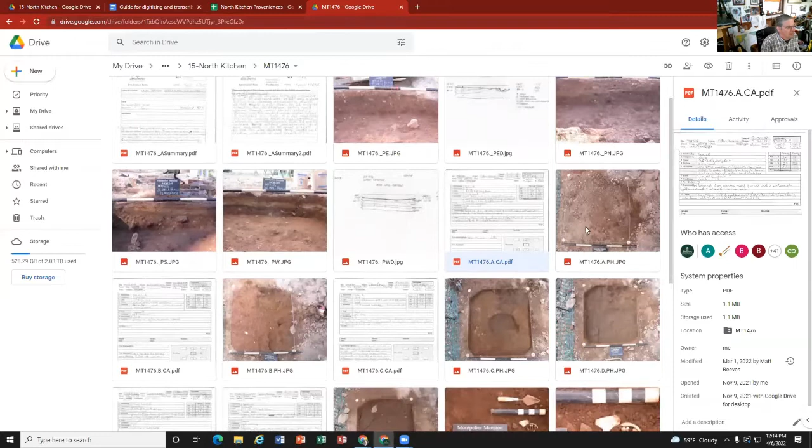All right, so what's good to do is basically go through these cards and just get familiar with them. So this is stratum A.

It was below strat O, which doesn't have a card because - is there a strat O in this? Yeah, there's no strat O listed in this. I think strat O is just considered the rubble from the building.

And you can see all these descriptions, the soil color, the texture - this is all the information you're going to be entering as you get into the digitizing process and the transcriptions. And this has how the stratum relate to each other. Stratum A is below O and it's above B, C, and D.

And then when you look at this drawing right here, you can see this is the bottom of A, and it came down to B, C, and D. And when you look at the opening photo for A, you can see that A is all across the unit.

And so usually the cards, as I remember, have the opening drawing. Yeah, what do the cards usually have - is it the opening drawing or the closing? I always thought it was the opening. I always thought it was the opening too.

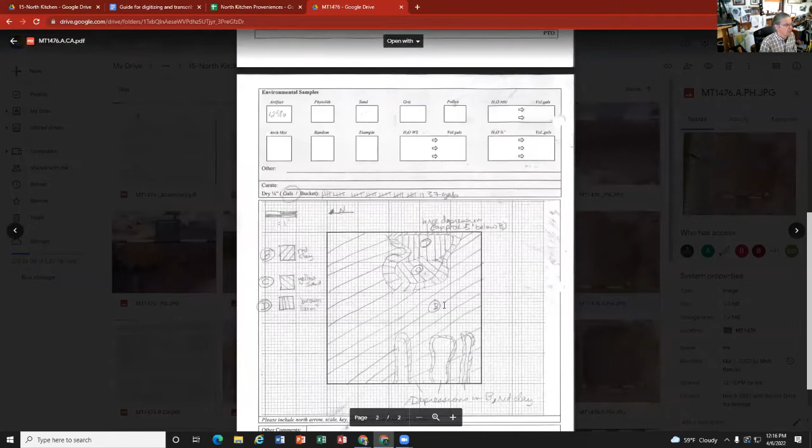Yeah, this is why this one's a little confusing, because usually it's the opening drawing, but this is the closing because it's come down into B, C, and D. You can tell that by the drawing, but also by this description right here - it comes down to B, C, and D. So when they took off A, basically all of these different stratum are here.

And how you know that A went across the unit is in this opening photo - A is everything. So A is bits of concrete from the destruction of the building, and basically it's all the stuff that needs to be cleaned off.

And then when you get to stratum B, which is below A in this card, you can see the opening of B. You've got B, which is all this, and then you've got C and D, which is this feature right here. So B is what comes off after A.

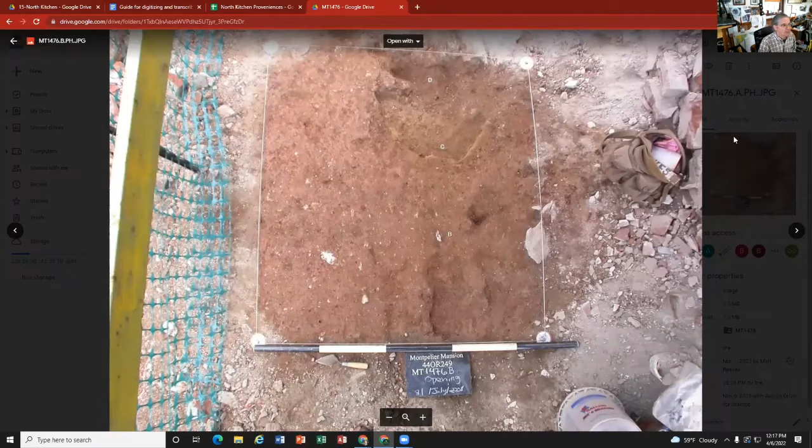And then you can keep on going through the cards. Stratum C was excavated, and it's contemporaneous with B. And yeah, it looks like they were doing closing for all these cards.

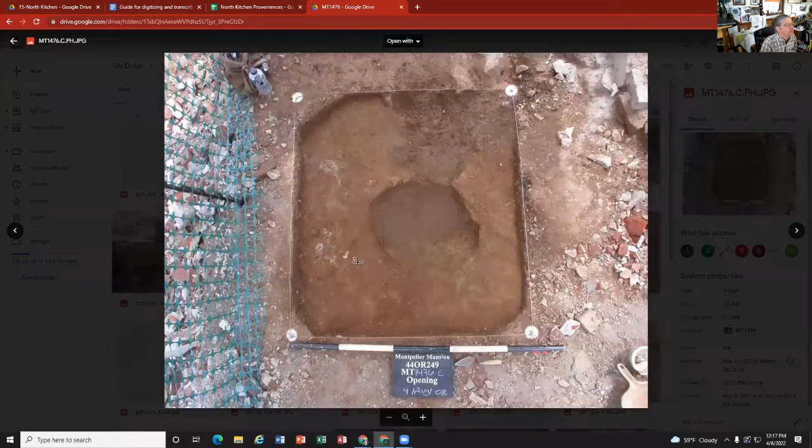And stratum B came down to C, which is this area right here.

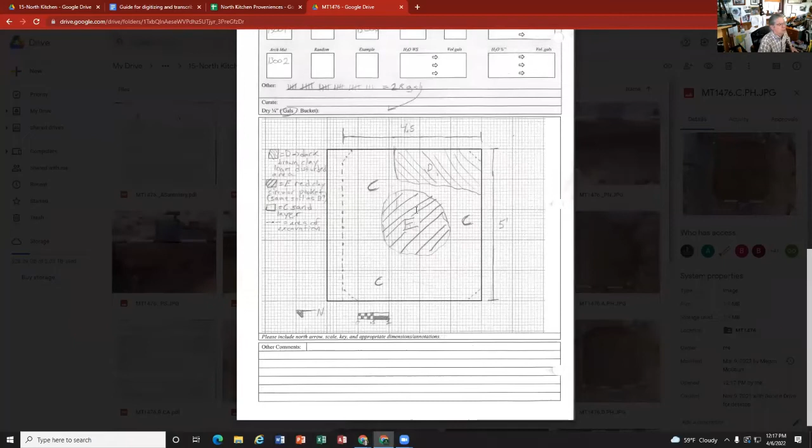And C is, okay, this one shows the opening of C because it shows C being all this area right here. And when we get into digitizing this, we'll talk about how to handle the fact that you've got this area in the middle.

That you can't really draw in because you can't draw that E. You can't draw E. Yeah.

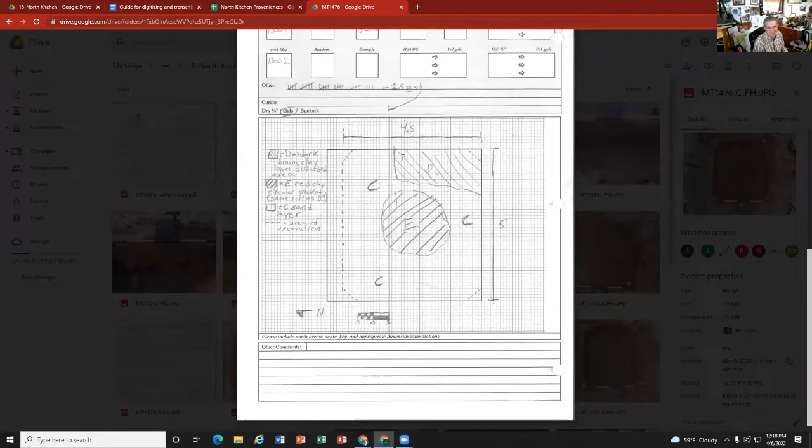And so C is just going to be, when you draw C, it's going to be this area right in here. And it's just going to, we can't let perfect be the enemy of good in this process. Just do the best that you can.

If you connected D and E at one point, you could get them all in there. That's pretty tricky with the app.

I wouldn't bother. What we'll do is we'll go back and fix this when we do the finalizing of these records, when staff does this next year in ArcGIS Pro, because you need the full version of ArcGIS Pro to really edit these in a proper way.

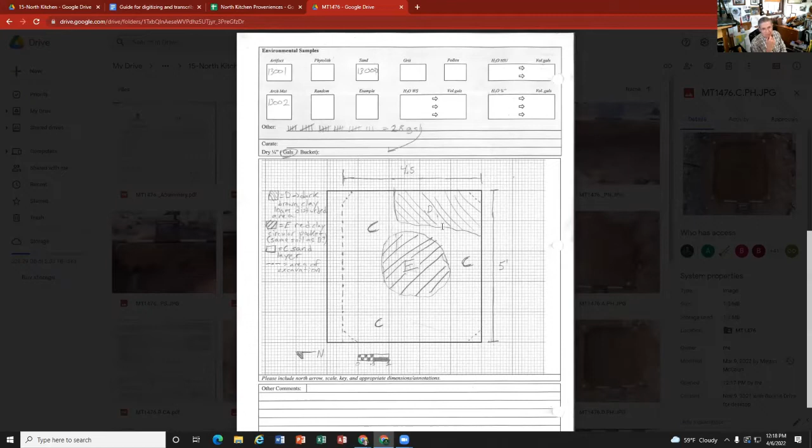But what's the big help is getting all this stuff transcribed. That's where you all are doing the lion's share of the work with all this, and it's a huge help. So, but let's get into this.

Let's start digitizing. So we're going to start out with stratum A here, and stratum A is listed as MT1476A. And what we'll do is, another thing you can do is check your sheet and understand how everything was excavated before you start digitizing.

So you know kind of the history of the unit. And then I've got the stratum guide. This is for 2007. I'm going to find the one for 2009 and put it in here. So you'll have what was the stratum guide for the 2009 season here, and I'll update this.

But to get to the web map, what you'll want to do is click on this link right here, and this is going to take you to the web map. And to find the unit you're working in,

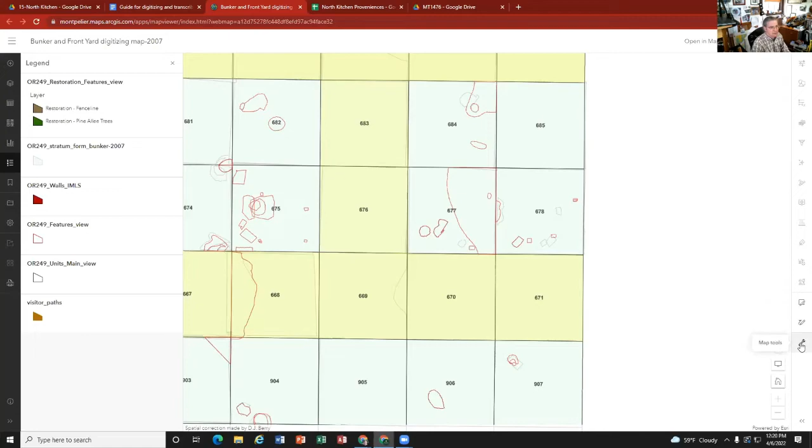What you'll do is get over to where the North Kitchen is, and here's all the units of the North Kitchen. And to find the unit you're working on, we're working on MT1476.

Click on Map Tools. Esri keeps changing the menus on this, and it really irks me because it took me a half an hour to find this. I was going to have other things done, but I spent a half an hour looking for the search tool. It's under More Tools, and then there's Search.

So I think they're trying to drive people insane. I really do. So and next week they'll probably change it again. So don't feel like you're losing your mind. Esri is just improving things for the users.

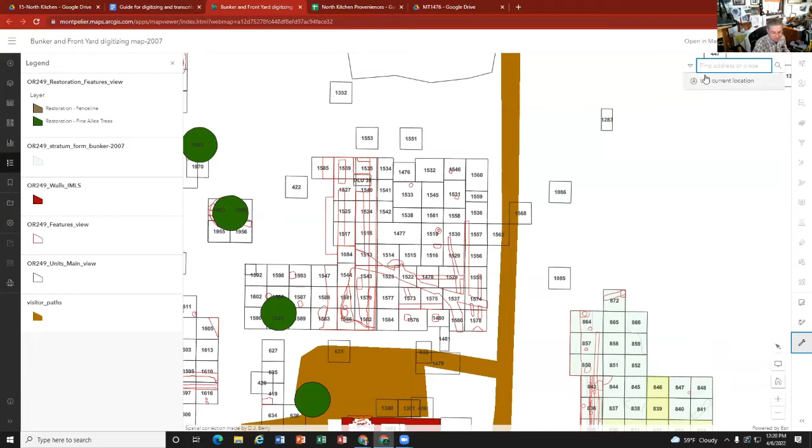So click on Search, and what we're going to do is put in 1476 and hit enter, and it takes us to 1476.

And then what we'll want to do is you'll want to go to edit, and we're going to create a layer or a polygon in OR 249 stratum form bunker. So you'll click on this, and then we're ready to digitize.

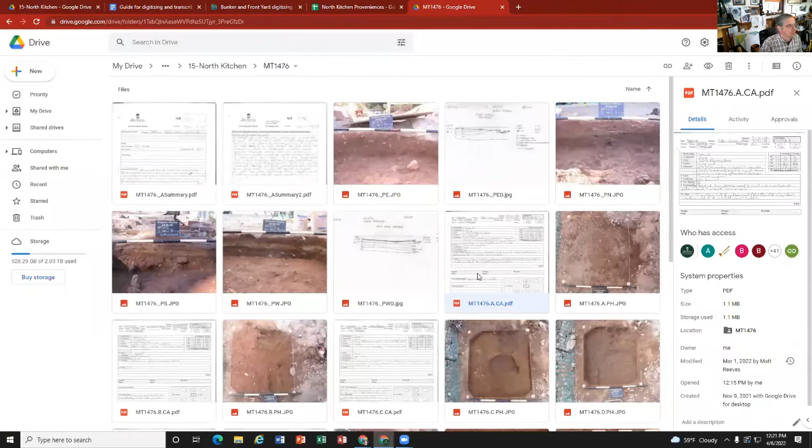And for digitizing this, to know what part of the unit it's in, this is where we go to usually your stratum A card, but this has the bottom of stratum A, so you don't know what was excavated unless you go to your opening photo, and you can see in this the letter A.

A is everything, and this is kind of the default. If you have any doubts about what was excavated, just draw in the whole square and the world won't end. It'll be fine. So in this case, it's all of this unit.

And what I'm going to do is go back to this right here, and we're going to draw in the whole unit and try to get as close as you can to the corners. And you'll see it turns green.

And when you're done, you double click and you've got your polygon. This is all the stratum. And don't worry about trying to, technically there are balks. Don't worry about that. Just draw it to the nails and that'll be fine.

And now what we're going to do is we're going to start entering all this information right here. And for that, there under this guide for digitizing, we've got the form right here with all the fields numbered.

And then this illustrated key is right here. This list right here is the list of all of the fields that are right here.

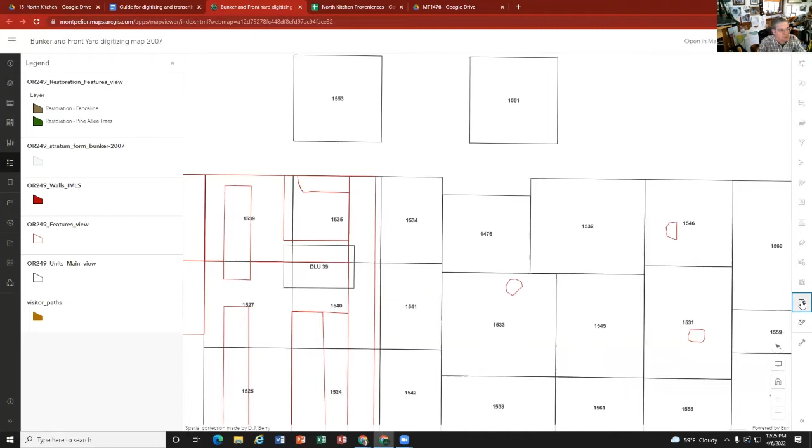One thing about doing digitizing, if you accidentally digitize a polygon out here and you want to delete it, you can either just hit escape and it'll disappear. Like that's what I just did now. Or just let me know and I can go back and delete it. So if you want to practice and make some polygons out here just to play with it, feel free. You're not going to break anything. And if you accidentally create polygons that you don't want where the unit is and you need help, that's what Slack is for, and we can help you out.

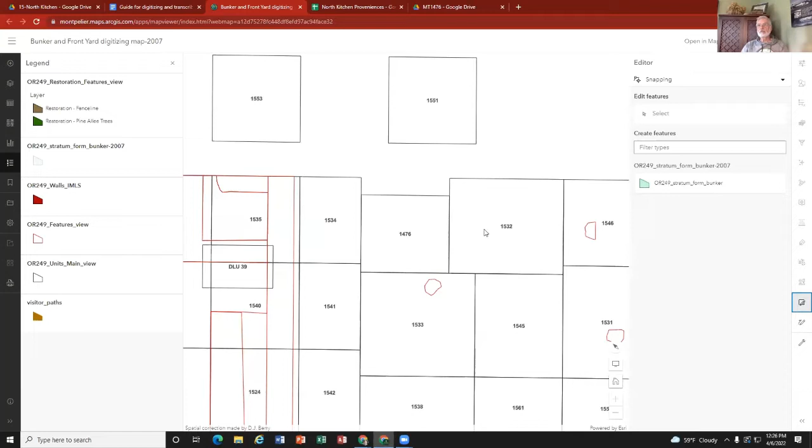So the nice thing about this is it's pretty hard to break stuff. So if you wanted to go in and try to delete things, I'm sure you could figure a way to do that, but don't do that. Hey Matt, the previous version would still, you could go back, it was saved. So you're saying now what you just did, all that information is not saved any longer? It didn't save because you have to hit save on it. So there's no green here. Right, that means it's gone. So I'm going to go in and create another one.

Create this A polygon again for the stratum A right here. Double click, and then this comes up. So it's MT 1476. Stratum A, there's no feature. The project is... If there was a feature reference on the card in the associated feature box, would you put that in the feature field? Yeah, put that in the feature field. If this was the stratum C, for example, was fill within a feature, you'd want to put that in the feature field. Absolutely, and we'll get to that. I think there's some examples of that here.

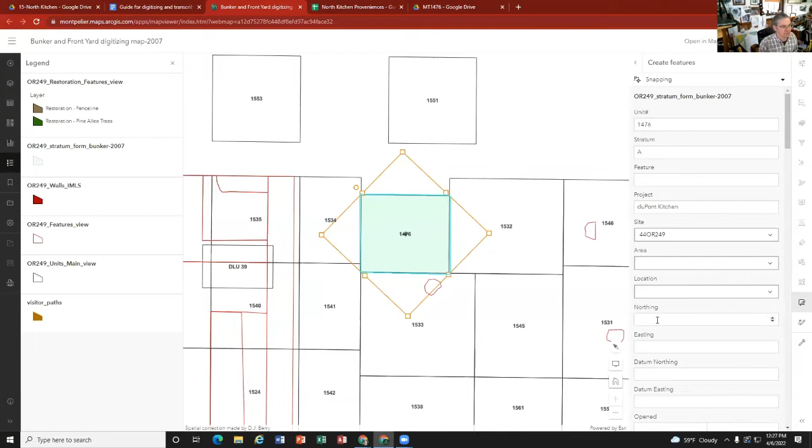And then the area, this will be North Kitchen. Location will be North Kitchen. I'll go back and fill that in. The northing and the easting is for the unit. So we'll go back to here. And this northing and easting is right here. North 671.5, east 764.5. And this is where it's really helpful to have like a split screen.

And I'm gonna do this like so you can see both at the same time. So in this case, we got the card right here. You could either have two screens, or you could have your iPad with either the unit information or your tablet, and then your desktop or laptop has the stuff for data entering. Either way, you figure out what works best for you. The northing in this is 671.5. Easting is, and this is coming from here, the location, 764.5. And then the datum, northing and easting, is this one right here.

667, it looks like 667, and then the easting is 759.5. 759.5.

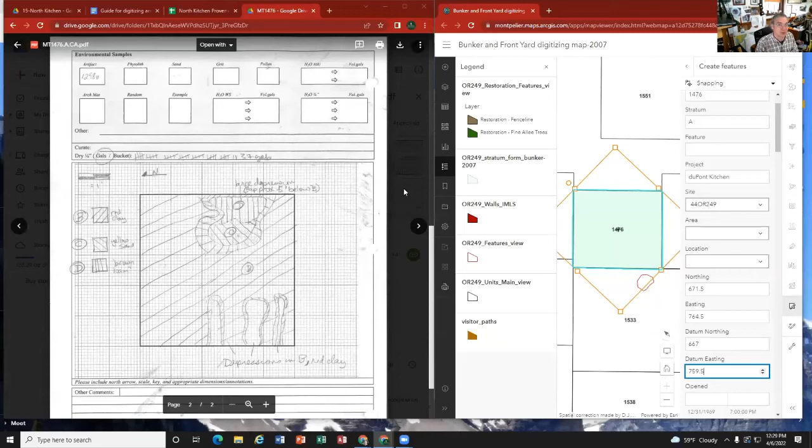So, fun times. So we got the datum, northing and easting entered. The date opened is 7/31/08. And then the time doesn't matter.

The thickness, this is where you figure out what the thickness range is. It's from...

There's no difference in the opening and closing elevations, so put what's there. I don't know, that's I think what this is - stratum A is a cleaning pass of all this debris, and not much was taken off. So when they measured it, you had your line level and your ruler, and basically there was no change because they just took all the concrete bits off. So it was almost like just a cleaning pass, so do what's on the card. I mean, you can't just do it. And so usually if it was 0.22 to 0.32, that's like 1/10 of a foot, and then 0.23 to 0.83, that would be 6/10 of a foot.

If those are the minimum and maximum ranges, that's what you put for the thickness - minimum maximum ranges. And remember, in the guide for digitizing, all this stuff is described right here. So your thickness, number 13, which is this one right here, is a range from the smallest and largest differences between the opening and closing elevations.

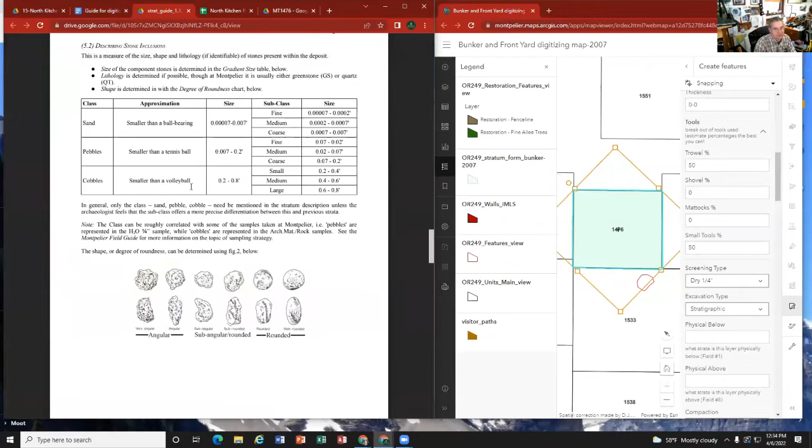One thing, the guide, the excavation guide, goes into describing all of these categories. So this is what, when you look at your guide for excavation, this strata guide right here - this one is Guide to Completing Stratigraphic Sheets. This is what we used that season to fill out this sheet. This talks about the entire process, so it's really good to review this because it'll give you an idea of what all these categories are.

So yeah, go back to the stratum sheet right here. This physical above and below - physical below, this is what strata is this layer physically below. And so this one is field number 1. If you look at your guide, this is the physical below, this is 21 and 22. Where is that one? Yeah, next stratum and the relationship below A. So physical below is this one right here.

And so this is stratum A, and what it's below is number 22, which is C. So that's C. Does that make sense? Because you just listed it off, the example.

Oh that, shoot. Yeah, thank you. It's the wrong card. Yeah, that's bad. There we go.

So what it is, is below 0. So below 0. And I swear that was a trick question to see if y'all caught that - everybody had like a squirrely look, like Matt's lost his mind, he's using the example. And then next stratum is B, and that is B right there.

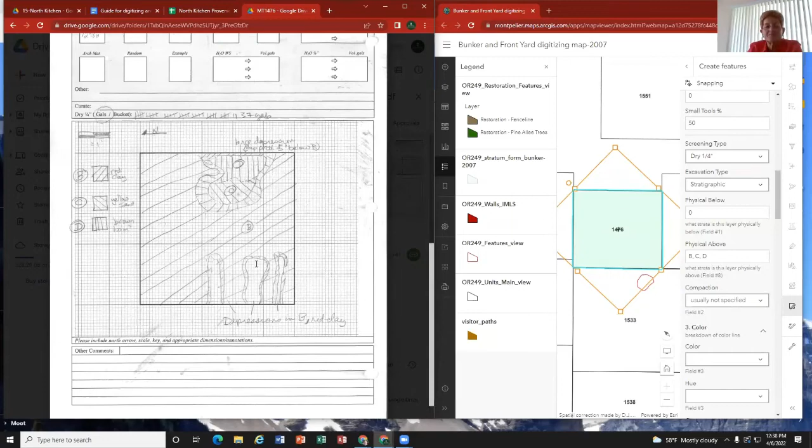So that would kind of help you. But if they didn't show C and D on that, then you would just list B. Does that make sense? Sure, that makes sense. I think there is no technically right or wrong answer with this. Use your best judgment, and if you have questions, just ask on Slack.

But to tell you the truth, I might do this differently. If I did this today and then I did it tomorrow morning at 4 a.m, I might do it differently. But either way, it's not going to be the end of the world, so don't sweat it.

Well, you know more than we do, so you have a deeper perspective that I don't. So I want to just pretty much stick with transcribing what's on the sheet. Leave the analysis to someone like you to look at it later and say, wait a minute, that doesn't quite jive.

And there's some variables that we want to have tightly defined. If we wanted this to be a single answer, that's where we do a pull down and it restricts your answer. In this case, this is something where you could put in multiple things, so there's some flexibility with that. These text fields exist because there's multiple ways to do it.

So the compaction, this is number 2, and this should be friable, and we can see that's on there. Color for this one, again you can go back to your sheet, and we can see the color, hue, and chroma, 24, 25, and 26. All this is right here, 7.5 YR 4/6. So the color is strong brown.

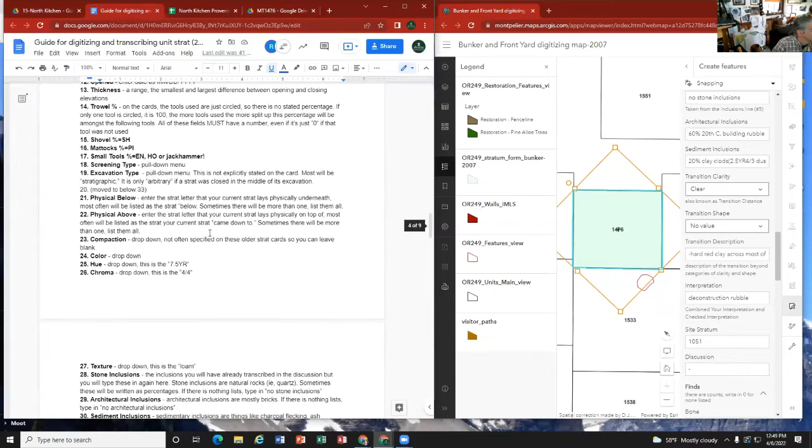1051. And then any discussion, this comes from number 20, line 20, which is right here, your discussion.

And there's nothing there, so in that case, how about the information that's on line 10? That's what I would put in as discussion, where it says southern half of unit has most of the silt and the clay clod. Number 10, I would put that in discussion when left to my own devices.

Yeah, I've got that as line 56. Oh, that's under how it says notes, here under notes, okay. And really, again, it can go either place, right? There will be no lives lost if it goes in one line or the other. Yeah, I think we talked about that previously.

So just leave discussion blank. And then the finds, these are the counts. You want to put in 0 if none are listed. These are the counts right here. So bone is 1, ceramic is 8, and you just kind of pick through these. Glass is 5. Nail is 2 - oops, I don't want negative.

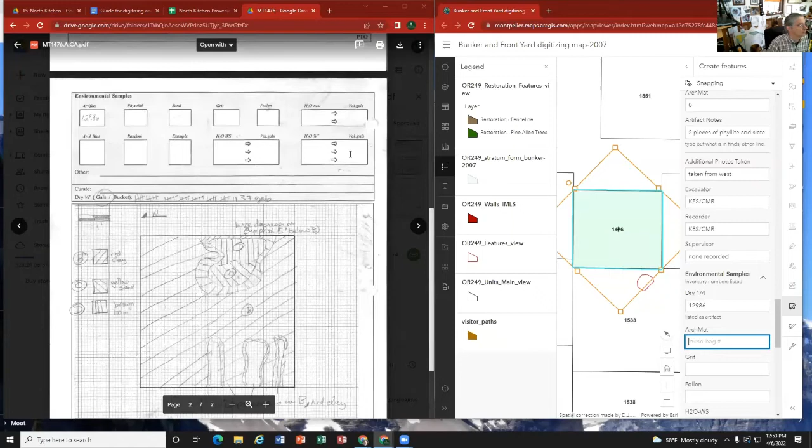And for these guys, we put NONE in every one - none, right? That's what I do too. Isn't that what everybody's doing? Yeah, yep, awesome.

None. And then do you all check your stratum sheet right here to make sure? Yes, yes, double check that. I do that first and write it down on a piece of paper so I have it in front of me.

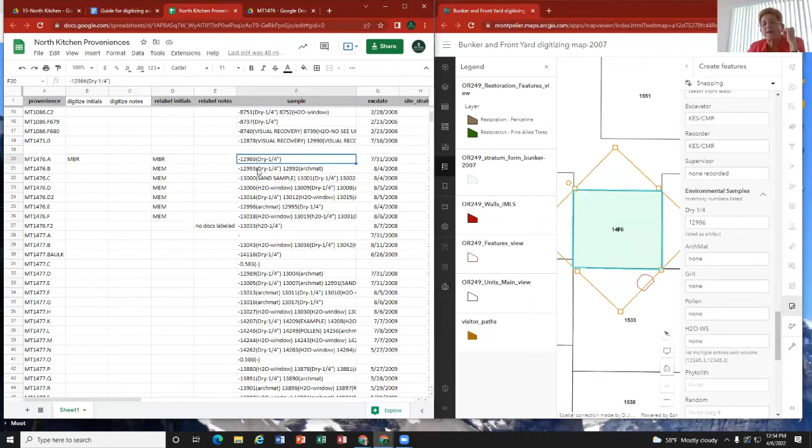If they don't match up, then you need to put a comment - you write a digitizing note on the Google sheet under this. The nice thing about this is we're gonna be able to go back and correct our inventory numbers. There's some that have been wrong for over a decade, and this is a really important part of getting this right.

That reminds me, I'm sorry, I just want to say - can you confirm that you do put just the numbers that are on the card?

You don't add numbers in if they're missing on the card but listed on the Google sheet. Put only the numbers that are on the card, then make a note that the Google sheet lists others not shown here - that'll need to be checked later. When I did labeling, I had a couple units where they didn't put any numbers on the card at all, it was blank. What you'll need to do is put in 'none' - just put 'none listed on card.'

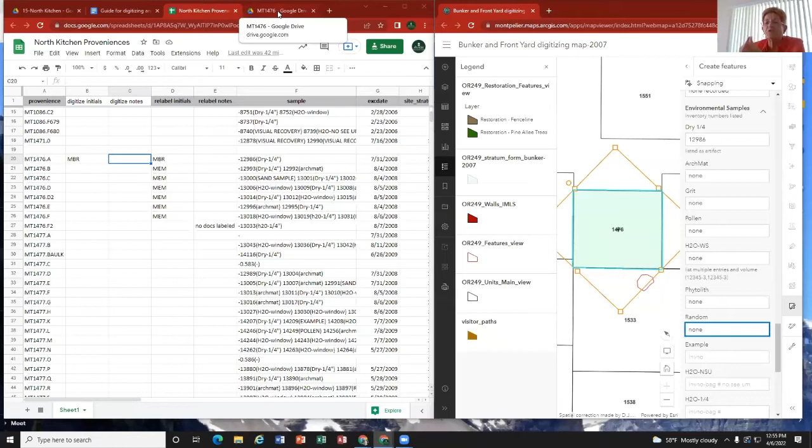The other thing I've encountered is I always look at the summary sheet for each unit before I begin, and I've found discrepancies where the bag numbers listed on the summary sheet do not match the bag numbers on the Google sheet, or they don't match the ones on the strat card. If that's the case, I wrote notes about that also on the Google sheet, although I don't know if we're ever going to do anything with those summary sheets, but I'm assuming somewhere in the future they're going to get digitized too.

The summary sheets - we have not made a decision on that, but that would be done in the future. That would be another, separate feature class from the unit stratum.

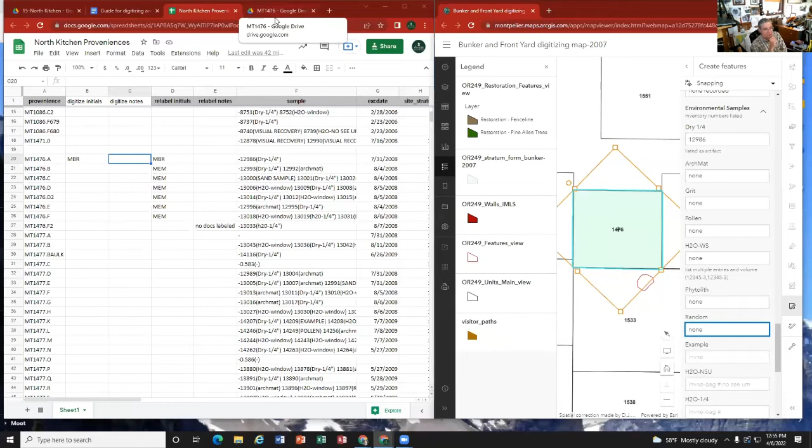Should we look at the summary sheets? I found them helpful, especially for drawing the shapes of each strat a lot of times. Looking at the unit summary form is good - it gives a history of how things were excavated, gives you the progression of how things are excavated.

But if there's information on this sheet that doesn't match - like you have all these samples right here, if the bag numbers were all wrong and it doesn't match, don't worry, just put what's on the stratum sheet. Because what we're doing in this process is a direct transcription of the stratum sheet right here, and the summary sheets will get dealt with later. So we're going to continue to put 'none' in these.

And then the gallons excavated are listed here, 37 gallons, 37. And then notes.

Notes - any information that has not been entered onto a field. The most common is number of buckets screened. So basically anything that you didn't find a place for, put it under notes.

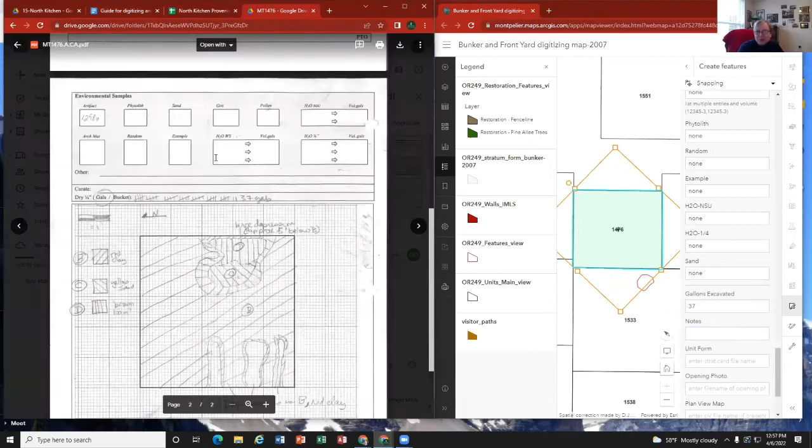That's a catch-all. So like what you were saying up in item 10 - one thing that always goes in notes is the condition, which is up on the line, which unfortunately it's not in order, but that one always gets in there.

I always do that too - temperature, weather, the hot, humid conditions. Yeah, that's a good one.

And I will put under notes, add.

And then sometimes, I should say this too, if you go look below the map on the last page, sometimes there are notes down there and other comments, and I will throw those in also. Or they might be part of the description.

Sometimes in the good old days when you didn't have enough space, if you have a very lengthy description of something else, you would have to go there. But it seems like the last areas we're doing, we didn't have to do that because the form is different now - this form is developed for the forms we're using right now, which is nice. The old stratum cards, it was adapting this to it.

And then these ones I'd say are some of the most important information to get correct - the unit form, opening photo, and plan view. These are the strat card. These are the file names from the relabeling process. For example, the stratum card is this one right here.

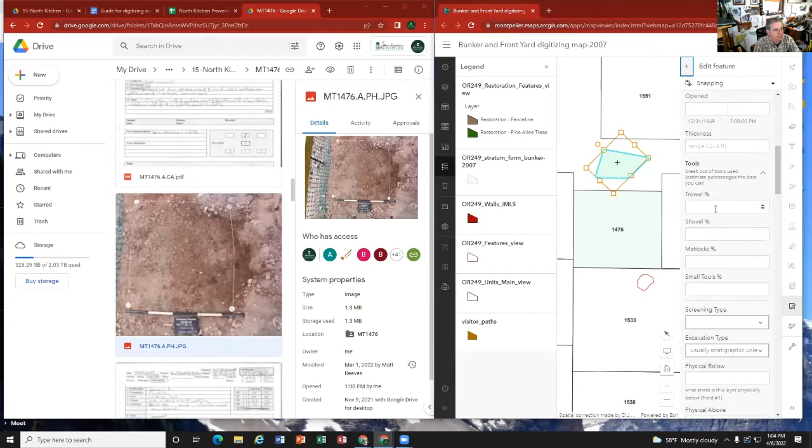So let's go back and create one. I'm going to do this one right here and just put in some garbage, then create. Now I'm going to go back and edit - to get out of it, you click on this again and it goes away, but you go to edit and select. So now select this one, and now I can delete it. It says the feature will be permanently removed. And now it's gone. Okay, so practice.

I mean, please don't practice deleting stuff. But you can practice deleting if you try drawing and it connects when you don't want it to, so you have to delete it. That's what you have to remember, where you can delete the one you messed up, just doing the drawing. You're not even doing anything yet, you're just trying to draw the diagram.

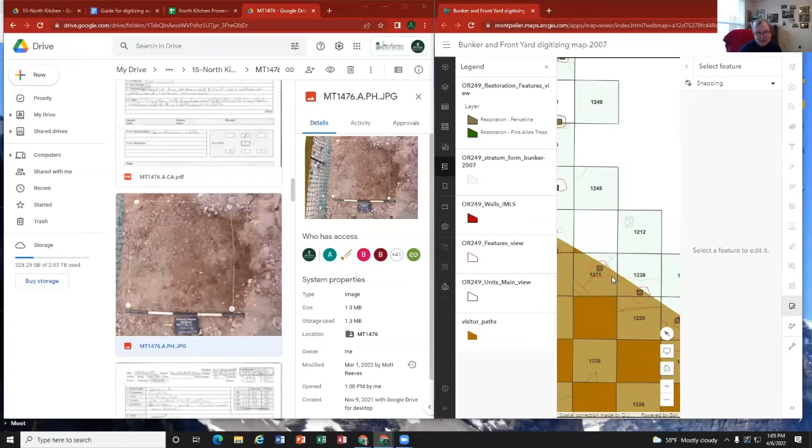But this is where we've literally given you the keys to the car, because technically you could go in and delete all this stuff and wreck the car, but please don't wreck the car. So just do some practice runs, and if you get into an accident, we'll forgive you. We actually have a backup of all this, so if something bad did happen and you lost your mind and deleted things, we'd be able to recover it. But yeah, I'd say start practicing.

And now that we're in this mode, when you're working in Slack, instead of putting your questions into relabel, can you all see the Slack form right here? Start putting it in, go into digitize.

So I'm going to say, hi everyone, we are officially starting to digitize the North Kitchen. We had training today and are rocking this out. Something cheesy, whatever. And if you have questions, put it in here under digitizing, and then we can all start answering questions and start in this process.

And Tyler and Margaret, how do you all feel? Pretty good, I think it's definitely an easy process - well, I shouldn't say easy, but it definitely makes sense. Cool, how about you, Margaret?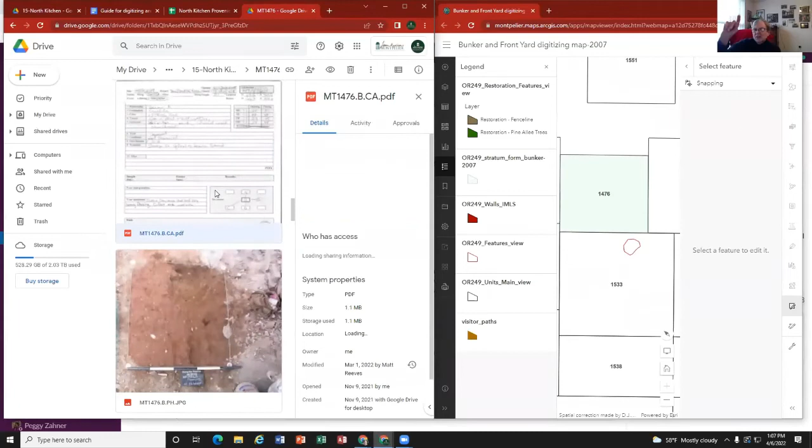I guess with that question, can I also interject that if we look at that example, the orientation of where north is a little different than normally, and that's something they should know about too. So the twist north is - you just have to twist it in your head, you have to twist your head around.

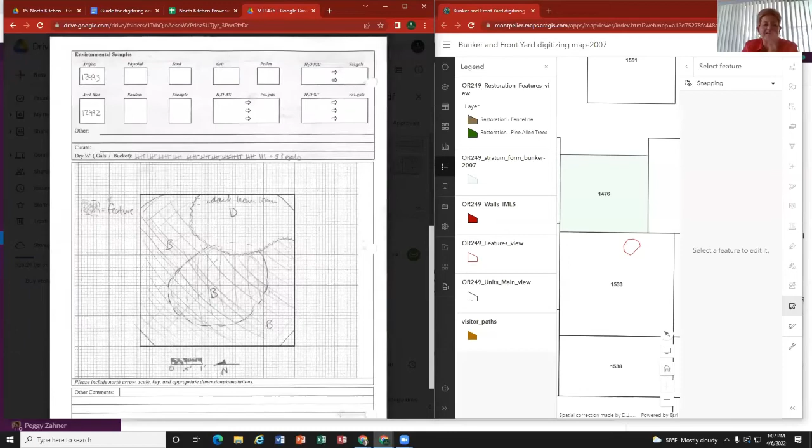Let's look at this stratum card for B, and you can see that B is drawn in over this whole area. But what you also want to do is go back and check the opening for B, and in this case, like you said, this is oriented to the left. This is why they drew this map sideways. This is C and D right here, and then B is all this material.

So there's a couple of things you could do so you don't lose your mind - in the map right here, if you right click, you can actually... Oh, I didn't know that one. I didn't know that either. Oh yeah, and then we can zoom in. Thank you.

I have actually printed out the maps from the strat card and twisted it. I am not emotionally challenged - I am emotionally challenged, but I'm visually challenged. So I need to have it like this to draw it.

So in this case, what we're going to do is go to edit and create a feature, and then we're going to draw this in. Again, do your best on this. So layer B is about so.

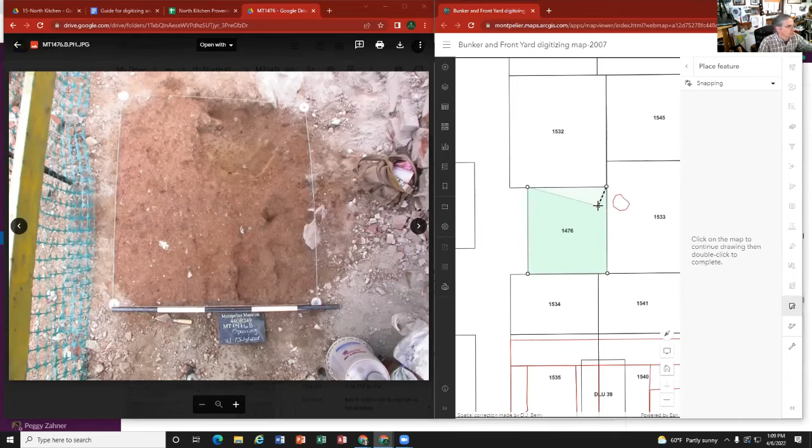This isn't quite halfway down, but get it approximately right. Perfect, yeah, that looks good, Matt. Thank you, wonderful. We need that reinforcement. Close enough for government work. So that's layer B.

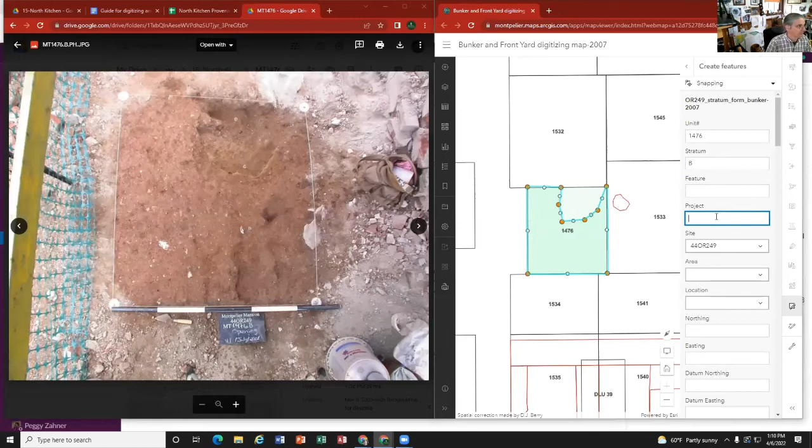So this is 1476 stratum B. It's not a feature. And this is, if we go to stratum B, kitchen, DuPont kitchen, and then keep on going. I'm going to save this one and then create it, so somebody can go in and start, complete this one, can claim it and keep on doing 1476.

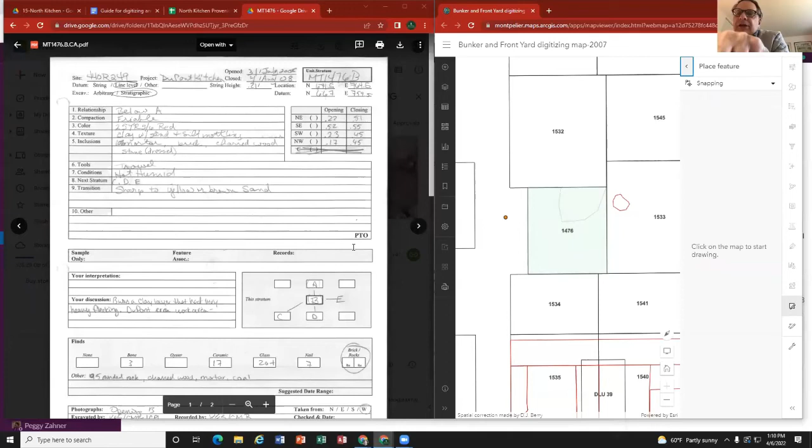What does B look like on the card again? Could you scroll down? On the card? Yeah, oh yeah, looks like, okay, that, kind of, you know, yeah, see, it's sort of different than on the photo a little bit, isn't it? And what you can do is, if you decide you want to change this, click on edit, turns it on and off, and you can select and then click on this.

And this, I need to fix this. This is so annoying, it doesn't have the letter, but I think, yeah, this one you have to click every time, and then you can edit your shape.

I think if you click right there. Yeah, normally I try to put what's on the card, the field card. I'm with you, because the field card, that's what we're supposed to be doing, right? I'm with you, Dean.

I would go off of what's on the field card. So I just edited this. Unless for some reason you just couldn't get it off the field card, then you could use the photo, I guess. But if the field card somehow was the bottom and there's nothing shown for B, then you'd have to rely on the field photo. But I'm with you, I would use the field card for this. So I like this the way you got it now, except there's a little piece at the top you can't get.

Well, right, I'm scooting this guy over. That's where I bring my 1-year-old granddaughter in, and she can get into this. It's fun stuff. So it's a little bit.

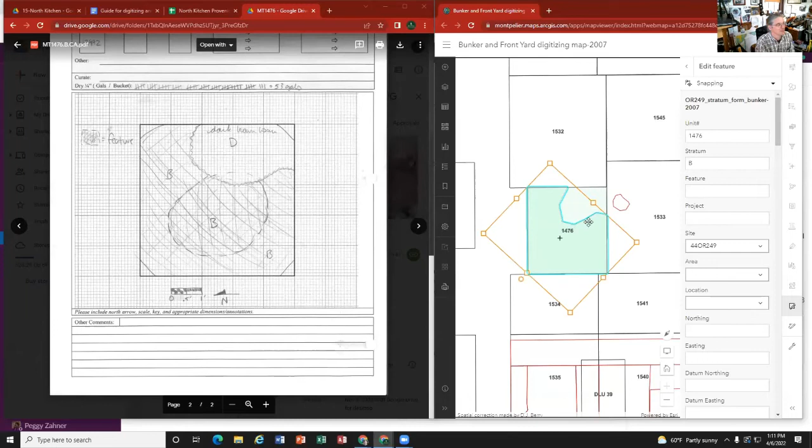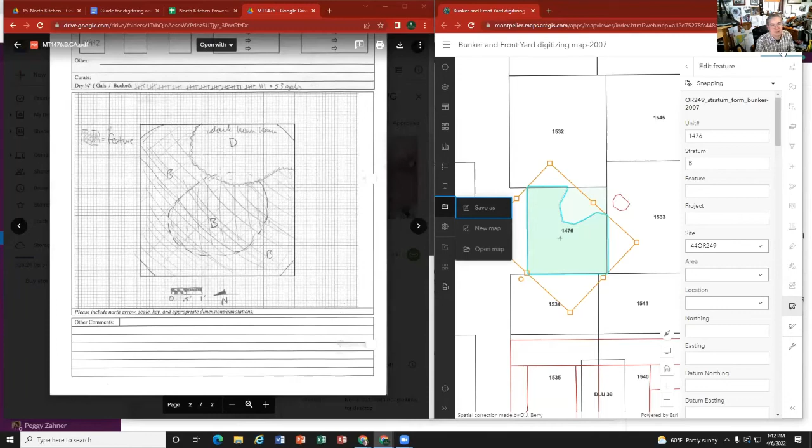Hey Matt, if you forget to re-rotate that back, does that mean when we go into it later on, it's still rotated incorrectly? No, because when you're in the save... I think you can't save this because you're not logged in. So when you open this back up, let me make sure I save this. You can save, update, remember always do update when you do edits. Right, and if I do refresh on this, it's going to go back to the way it was. In fact, it's going to go back to the bunker. Okay, so it'll reorient itself. But again, to reorient it, you just right click and then drag this and rotate it. So gonna have some fun with that.

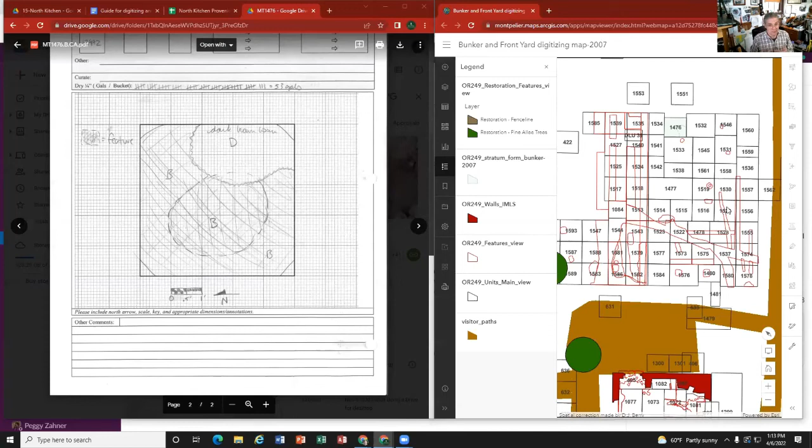With the features, they're just going in that same card, right? There's no differentiation in colors or anything with features, it's the same one. Yeah, and what gets recorded in terms of features is the fill, it's what's excavated, the actual cut, and there's a feature summary card for that. That's going to be recorded in a whole different layer of information called the feature class.

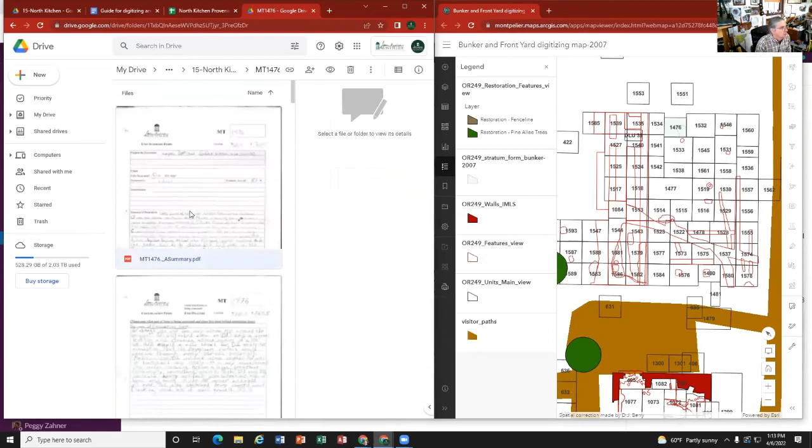And so there are forms in here in the directory that are not going to go into unit stratum because they're not unit stratum, like the summary form we were talking about. We'll probably want to put this information into the layer right here for units eventually, but we haven't done that yet, and we might go back and do that.

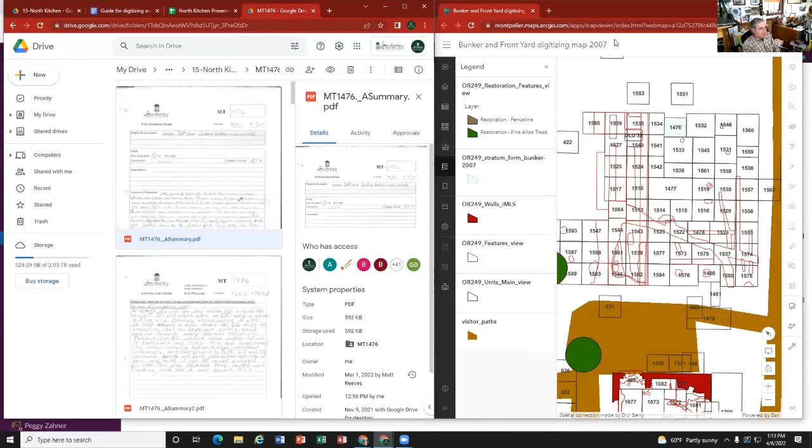So Matt, for the features, on some of these, the cards have like MT1476, F973 or something for the feature. Do you put all of that in there, the letter and the feature number? Do they both get reported? For that, put in what's in your provenience field or this Google sheet. Use the Google sheet as your guide.

So for this, is there any features? Do I have a feature on this? I need to add feature to this. But for this, I don't think we have any features listed, because what we did, starting in 2008, is we started assigning a letter to every single excavated stratum, whether it was a feature fill or a unit stratum, and it's sequential.

And that way you can see the order it goes. The problem with putting in the feature number, if it's before 2008, it's the little a, you know, the A, B, C, D that are lowercase. And the problem with that is, if you're on layer D and you find a feature, it gets labeled MT 1476 feature 231 little a. And then when you list that in order, since it's F, it'll come after either F or E, and so it's out of order. So that's why we started just assigning letters, uppercase letters, to all the feature fill.

So in the end, it's all shown in the order it was excavated. And for this, after 2008, when we stopped putting in the lowercase letters, we gave an uppercase letter to every single thing, and we're not putting the feature number in there. If you have any questions on that, just ask in Slack.

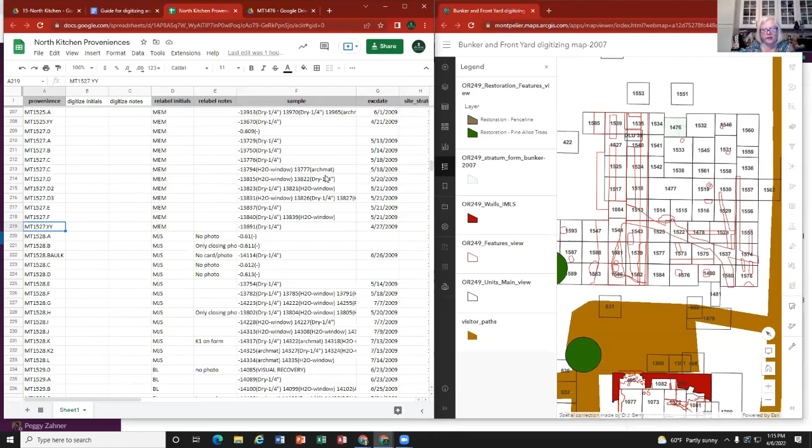Any questions on this? So there's also, on those cards, a section that says associated feature. We don't put that in the feature field either. We're just going by the letters.

Let's see, for 1476, let me see if there's any features that were excavated in this one. Shoot, this one does not have any. Does this have a feature?

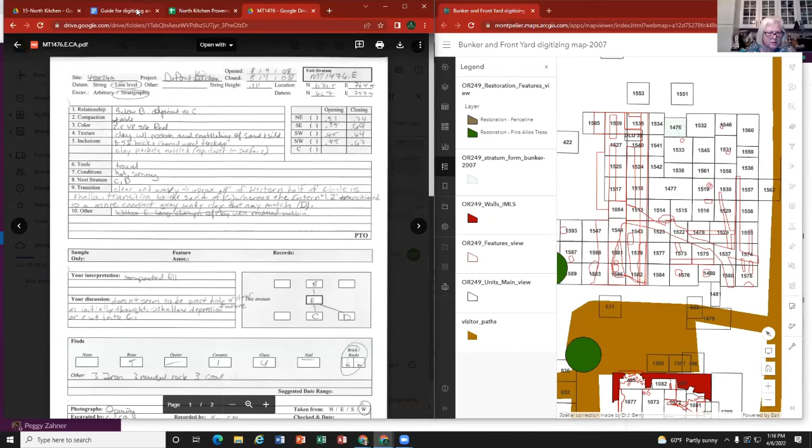No, but some of them, see that field that says feature associate, ASSOC, the one mid-page. If there's a feature, put in the number, and that's going to be up here. I just want to make sure we don't translate that to the map. We don't put that in the feature field on a map. If the feature is listed up here, you'll put that in that field. If you have questions about that, just let me know, because each one is going to be different.

Unfortunately, until we get to the 2010 season, there's a little bit of mix-up that's happened in the field work. So just ask for clarification on that, or if I'm not there to answer it, just put it in the problems folder, and I'll get to you on that.

Another question, Matt, while we talked about the summary sheets—don't worry about that, that's for the future. Same thing with profile wall photographs, profile wall drawings, same thing.

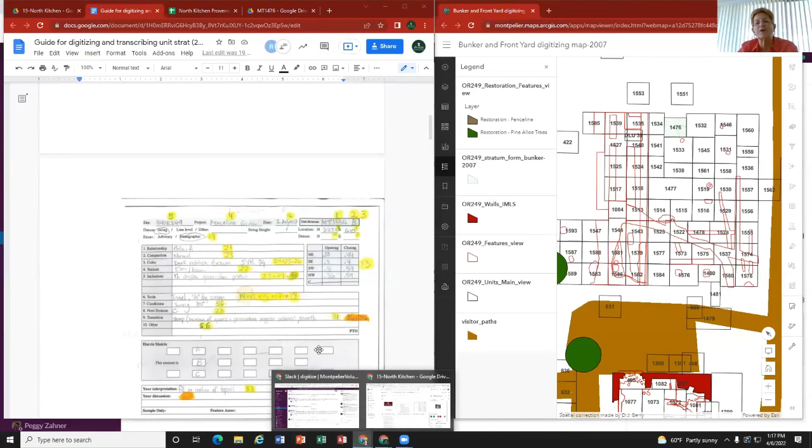There've been cases in the past where I thought, if I put into the description a link to this, it would elucidate this whole thing so much better. But then I thought, wait a minute, we're really not supposed to refer to a profile photograph, a wall photograph or drawing. Is that true? Just forget about it, like they don't really exist. They'll be dealt with in the future.

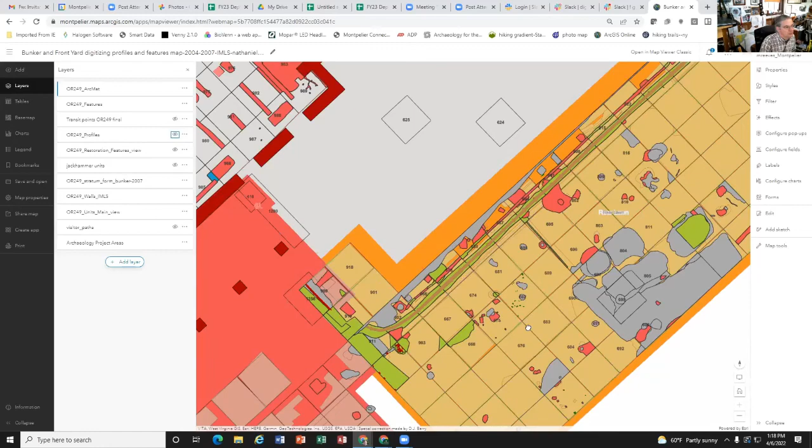I'm going to show you what Nathaniel and Lizzie worked on. There's a feature class called profiles. See how this map is changing? Let's get this north is up. And feature—where's profiles? So when you click on this...

You have to get to the feature one. Oh goodness, there it is. So this is the profile. This profile right here is described all right here. So the photo, the drawing, and the photo are all right here. So there, we do record that—it's just in a totally different layer.

Okay, so don't worry about it right now. If you go to the story maps, I'll put this in the chat. It's not going to get missed, in other words. No, it will not be missed.

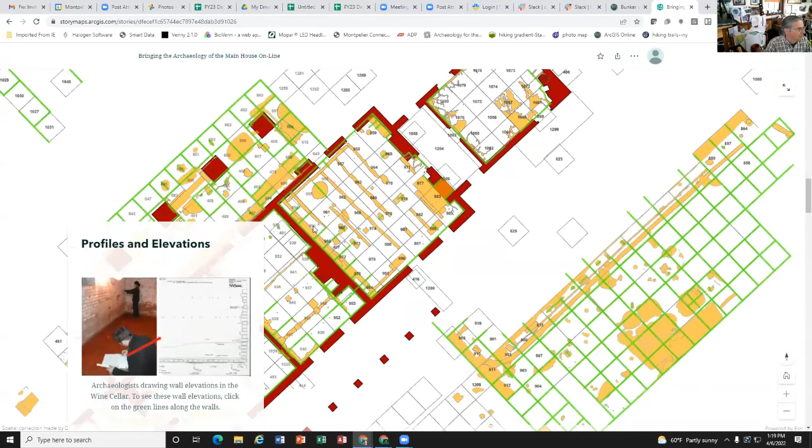Okay, if you go to these—this one, profile and elevations, like these—this is the profile drawing, and then here, this is the profile photo, and here's the drawing. And so these are all, this is a totally different stratum, or different grouping.

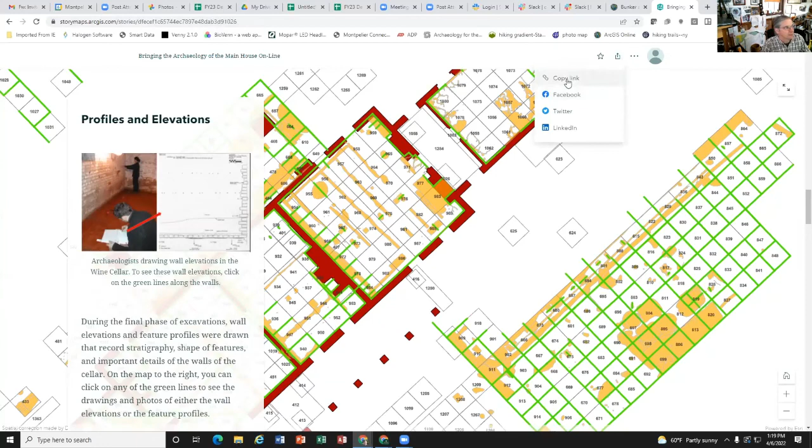And I'm going to put in the chat the link to this. So if you click on this link in the chat, you can play around and see where we're going with this.

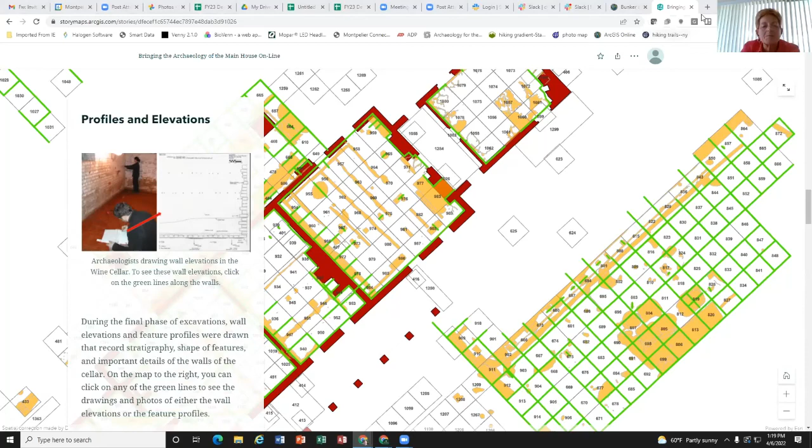So all these guys right here, like this, I don't have the opening photo downloaded yet. And what I've been trying to do—but we've had, the past month, we've had other political things coming up that have distracted me.

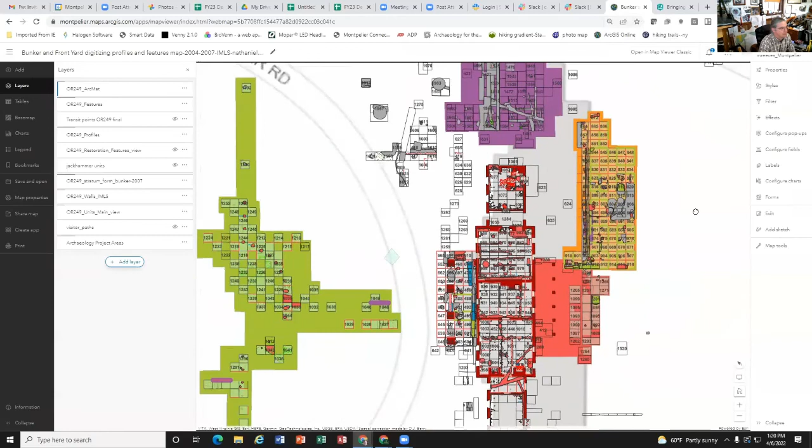I've wanted to download everything from the bunker—oh goodness, I'm fighting myself in this map. The story maps are hard to manipulate. We have all of the profiles that were done. Let's see, profiles—yeah, so here's all the ones that Lizzie did.

All these guys, I'm going to get all these downloaded and into our cloud server. So we'll have all these profiles and photos and drawings uploaded and be able to link them into these story maps. That's going to be my happy place when I get to download all the Google Drive and then make the links from the file names that you all listed and get all this stuff live.